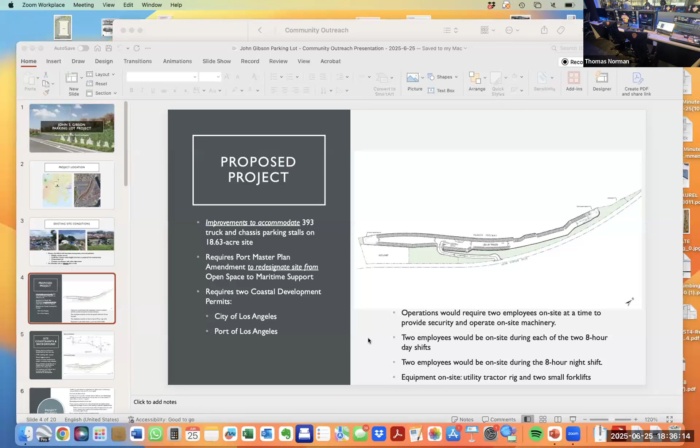I'm driving. Okay, so again, the project location is a vacant piece of property that's very long and narrow. It's on a hillside, and it runs from north of the police station up to the back door of the Phillips 66 plant. It's depicted on the map on the left, and on the right is an aerial, so that should give you a pretty good feeling for where we are.

We're not in the downtown area, we're in the port complex. It's an industrial site. It's been everything from a pipeline and a tank farm to what it is today, which is leftover property from the old Harbor Freeway construction.

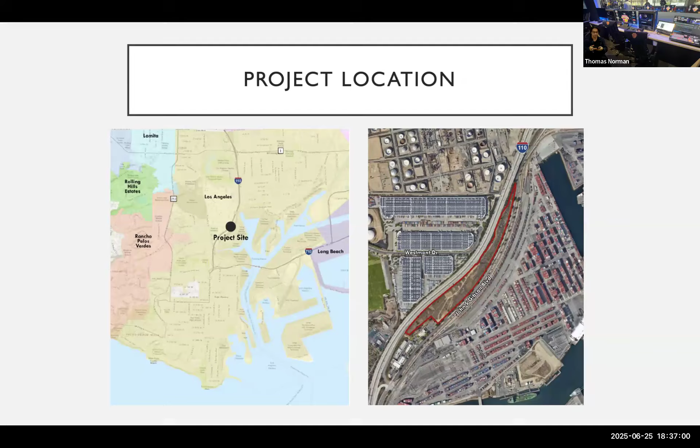So we can go to the next slide. Somebody? I think there must be a lag or something because I'm trying to change the slide. Maybe you can take back over. Okay, I'll stop my share.

So right now, I would tell you the site looks blighted. So okay, here we are, guys. As you can see, we have the beautiful port in the background, but we have a problem with the homeless encampment.

It's just been, despite the fact that we're next door to the police station, we've had some real issues with trespassing, and the homeless have moved in, and if you're not on it every day, then it gets to be overwhelming. This is as of two weeks ago, and it was three months before this that we had cleaned the property.

Are we sure we're on the right slide? Yeah, existing site. This is not what I'm going to build, this is what we've got. And can people online see slide three? No, you were showing the intro slide. Slide one was shared. Oh sorry, it gets worse, so just hold on. So one person can share at a time.

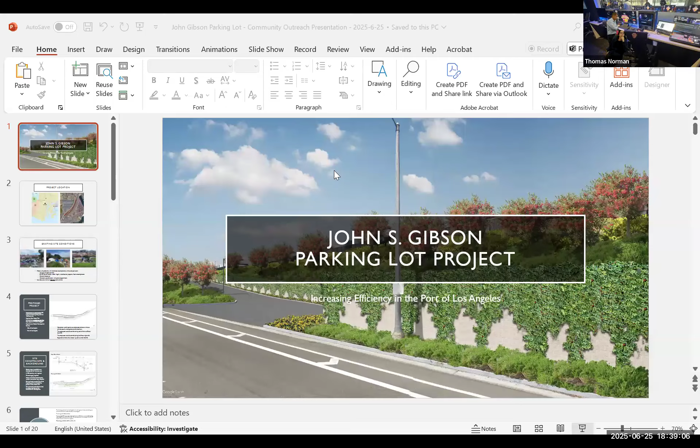What we've done is we've produced this set of slides, and Mike can share that with each of you in the council. Yeah, I think that's because this is going to get technical and overwhelming. It looks like it's working. Oh okay, let me just check. Is it working?

The highlights are, it's been a security problem for decades. We've owned it for the last several years, eight years.

During the rains, when we were in COVID, there was a lot of street camping on the other side of the Harbor Freeway. There's a tunnel that goes underneath the freeway that the campers were discharging their waste tanks from their motorhomes into. Everybody familiar with that? Oh yeah, and then it rolled under the freeway and came to us. We've cleaned up 52,000 pounds of human waste that washed down, and that had to be treated as hazardous, so we've hauled that off to the appropriate places.

Today, we're out there again, just a few months after the last cleanup. We have somewhere in the range of, my guess is, 10 truckloads to haul out of there at 40,000 pounds each, so that's 200 tons of material that just gets deposited on the site.

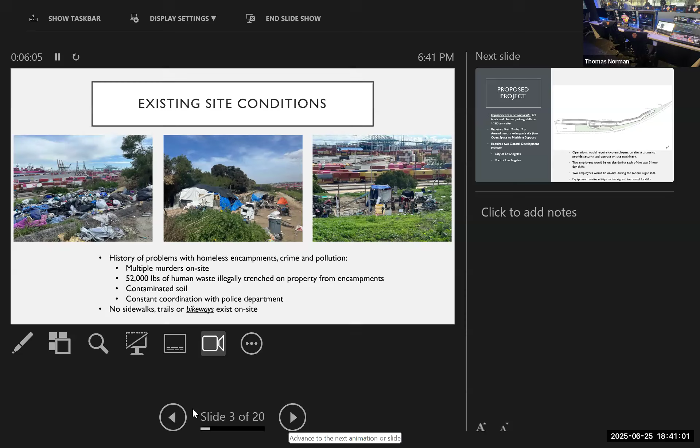So what we'd like to do is improve the property. It's on the heavyweight corridor, it's in the port complex. And if you just look at this, it's not Wilmington, we're not going to stack containers. It's nothing like that.

We have site pictures and we have renderings that have been generated through the aid of our engineering groups. But what we've got is 393 trucks, chassis with a container on.

Those will be taken from the port during the day. It makes the independent truck guys more efficient. They go across the street, they pick it up, they put it here during the day. At nighttime, then they take those loads and distribute them through the Southern California region. I mean, they could go as far out as the Inland Empire to make their deliveries.

So that's the concept: it's to improve efficiency. It's a short-term interim thing. It's not stacking, it's not leaving material. The logistics industry is all about efficiency. Augie talked about the ships getting bigger, that's more containers - where do we put them? We only have so much dockside space, so we need sensible development that makes the port more efficient. That's what we've designed here.

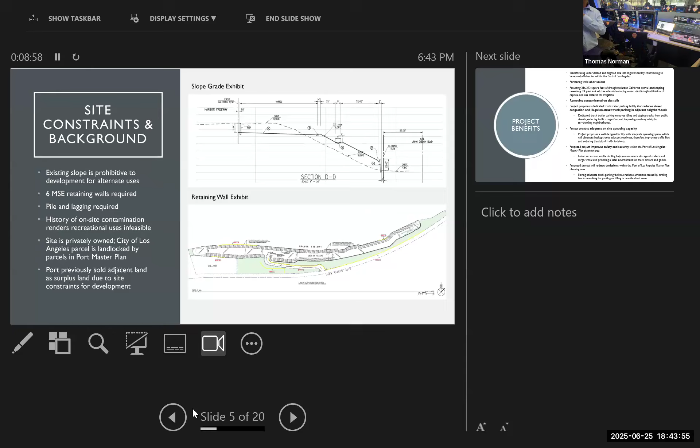Again, we're processing through the port. The city, the site's in - well, okay, we'll go to benefits. But needless to say, we're processing through the City of LA. It's an allowed use through the City of LA, zoned M3 - what they call 'by right.' But because it's in the influence of the port, we've been working with the Port Land Use Group for several years, and we had CEQA certified. We've done it twice, so we've double done it. I'm really proud of that because that costs a lot.

So we've lowered the site - 39% of the site here, I'll get my big head out of the way - 39% of the property is landscaped. So what does that mean? We'll install irrigation and California native material that's available in commercial quantity. Somebody will tell me, 'well, I like the wildflowers,' and I do too, except it takes a long time and they're not available.

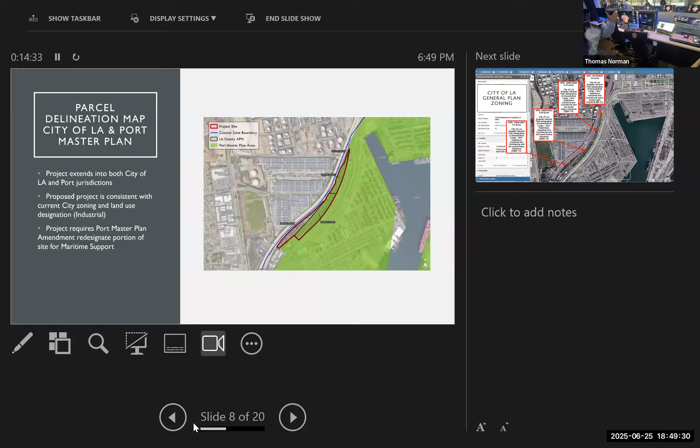That's the next one. We're joking around here—sorry, I'm on the wrong one. There we go. So this is kind of dorky, showing the jurisdictional boundaries. This is port, this is LA—the whole thing is LA here, port there. That's why we had to go to 2 masters. Next slide, I really want to get to this one.

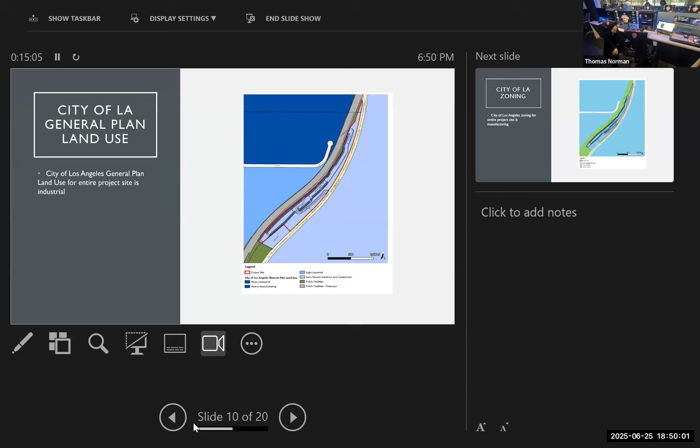You can blow by this, it's a great aerial. This one just shows the land use—it's all heavy industrial, so we're not taking away any residential use or impacting it. The closest sensitive receptor is over 1,360 feet away. That's why it's zoned M3, the heaviest zone in the city. It would never get approved, but you could store dynamite there.

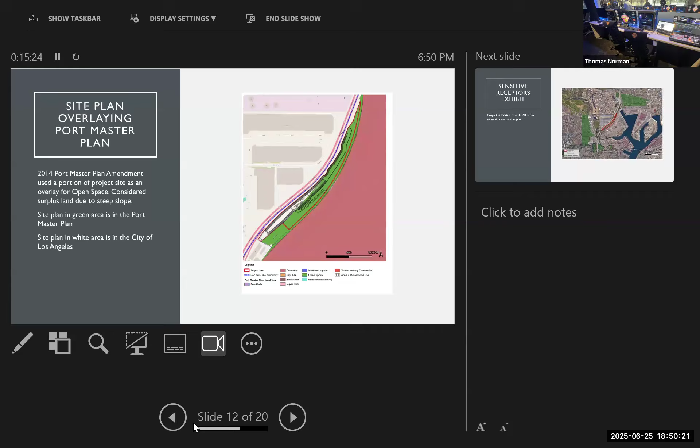Let's go to the next. What are we trying to say here? Let's go to the next—you guys can have this, I'll email it to you. Let's go to the next.

That's just showing the sensitive receptors, and again, there's nobody around for a quarter mile. We spent a lot of time driving the streets, and the impacts this thing alleviates far outweigh any kind of negative.

But here's what I wanted to show you. So guys, we're down at the south, driving up the freeway. What is this going to do? What's it going to impact? Is it going to look like junk? No, it's not going to be stacked containers 5 high like off the San Diego freeway—we're not looking for that. What we're trying to do is minimize the impact on sightlines. I'd rather see the port than the side of a truck.

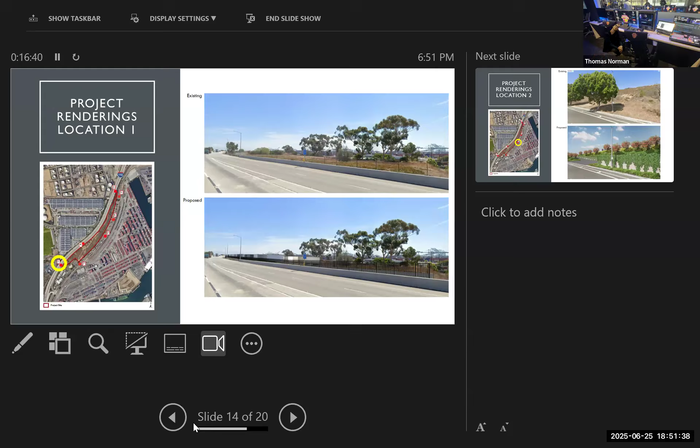We drop the site, put in a 2-rail steel fence—it's probably an upgrade. It looks nicer than the junk Caltrans has left us with for the last 40 years. We have a retaining wall, these are low, so with the trees we're only hitting them at about midpoint, and you can still see everything going on in the port.

Let's go to the next one, because I spent a lot of time on this. Here's what we have existing—it's ficus trees, which everybody knows break the curbs, break the street, break the sidewalk. So here's our retaining wall—we've landscaped it, put in trees, and here's the driveway.

It doesn't show the signal light, not because I'm trying to dupe you—we just didn't have the money to put the signal in yet. But I've done this for 25 years, and as an Angelino, I think this looks better than that. We have the responsibility to improve the port, the responsibility as a group to leave things better than we found them. That hasn't happened in 2 generations in Los Angeles, and I think we can do it.

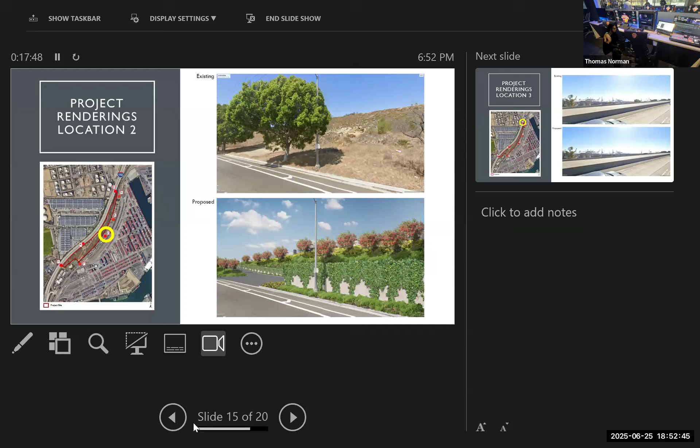Let's look some more—that's the middle, that's the Gibson, middle of the site. Let's continue.

Okay guys, we're up north, driving down the freeway, going toward San Pedro. What do we see? You can't even really see it, because on this side of the freeway we're higher up, looking down—we don't really see it. That's what I was shooting for, that's what we're trying to do. If you look at it, I think we've been successful, and I'm pleased with how this looks.

This isn't sleight of hand—this is hundreds of thousands of dollars, gang. The only difference is the ficus trees being cut down, or something? No, now we're up higher—the ficus are down low on Gibson. It looks the same except for the trees, because they are: the trees are going down, the trees are where they are. There are some eucalyptus up top, off property, so those are going to stay. Even though if they were Caltrans' or so, they're missing from the proposed plan—they're gone.

But I think we've satisfied our goal here. I know an environmentalist might ask me this.

From the previous one, when you said you're going to get rid of the ficus, what were the smaller trees in the back? Do you know what type of tree that was going to be? We've been using liquid ambers, podocarpus, and a lot of cypress to indicate the entries.

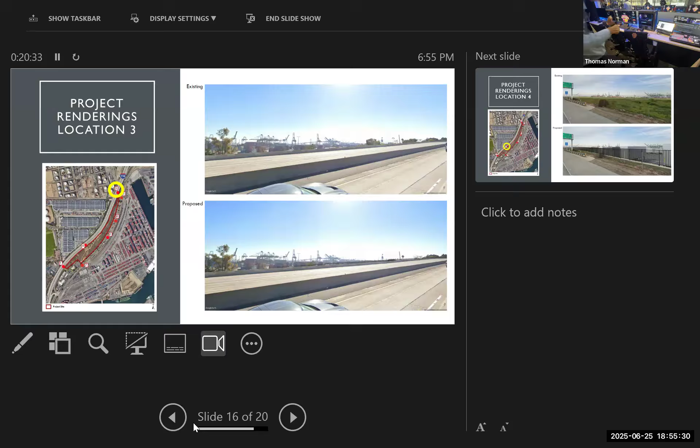I sort of like the way you said that. Yeah, sorry to let you down, sir. It's terrible. But okay, let's look at some other views, okay?

Right next to it - this gives it, makes it look like there is someone who has made an investment in our neighborhood and they're thoughtful. We're trying to do the development business. If you live here, you try to be thoughtful. I'm trying to be thoughtful because I lowered the site, because it's proximate to the port, because I'm trying to help the city I love become efficient and look neat and tidy.

Let's go to the next one. Before you go, let me ask you, what are we looking at behind the railing, the fence railing? So that is a trailer, but it's down low so you don't see it. You're only seeing it from the angle of the parking lot.

So here's where this one is - it's kind of down by the police station, and we're on the freeway. Right now the fence has a bunch of holes in it and people drop junk onto the property. We've had two murders - I didn't want to dwell on it too much, but that's the way the murderers jump on their Uber to get the heck out of there. I kind of make light of it because it's a difficult thing to talk about, but guys, we've got to do better as a community at large. This shouldn't be happening in your guys' backyard.

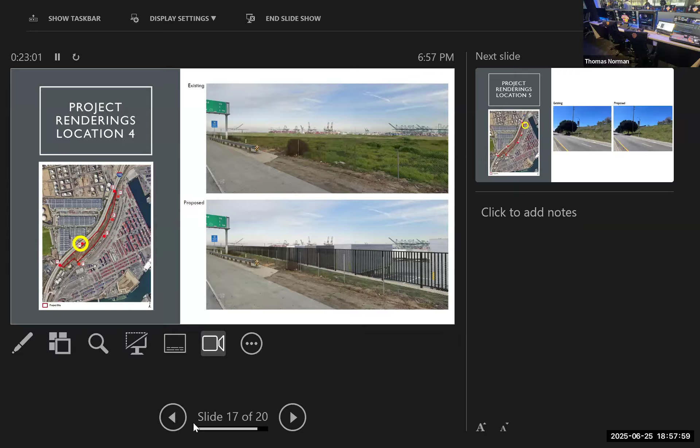I've done LAPD training, it's like - this is too much. I've been all over the area as well, so many of us here know this. I'm not gonna rag on them, because we're in a public forum. But thank you, this looks great. It's all about doing better. Let's just say LAPD doesn't want to work on this, they want to do whatever they've got going on - so I'm gonna take care of this myself. They know I don't like them either, so it's fine.

So here we are at the north - you don't see the trailers from Gibson. I want you guys to all know this: we don't see them from Gibson because it's 16 feet higher. You're not gonna see it, nobody's gonna see it.

Next one, I think that might be the end. Okay, so again, you lower the site, we're gonna have these retaining walls. I hate retaining walls, I don't want you to see them. That's why we've got 39% landscaping.

39% landscaping on this site is about just shy of 8 acres. 8 acres for regular people is like a shopping center, a neighborhood shopping center. Is that a fair description? That's a Costco, usually on 8 acres. That's a Ralph's, inline stores, bank, that's 8 acres. So we've got 8 acres of landscape.